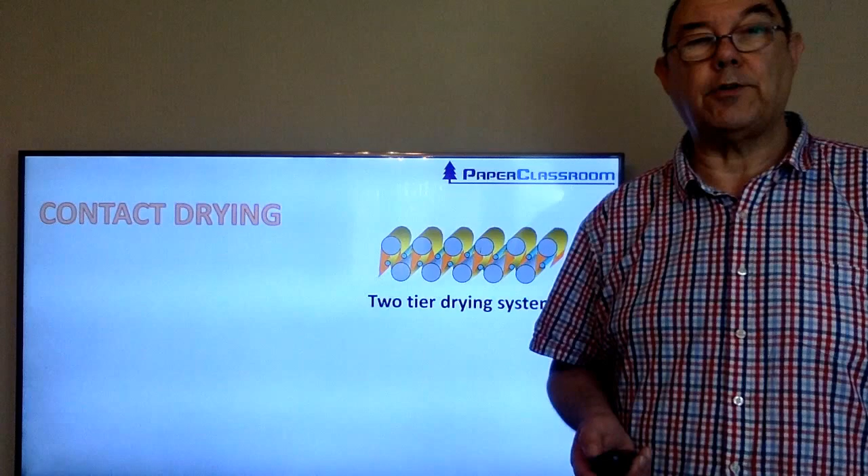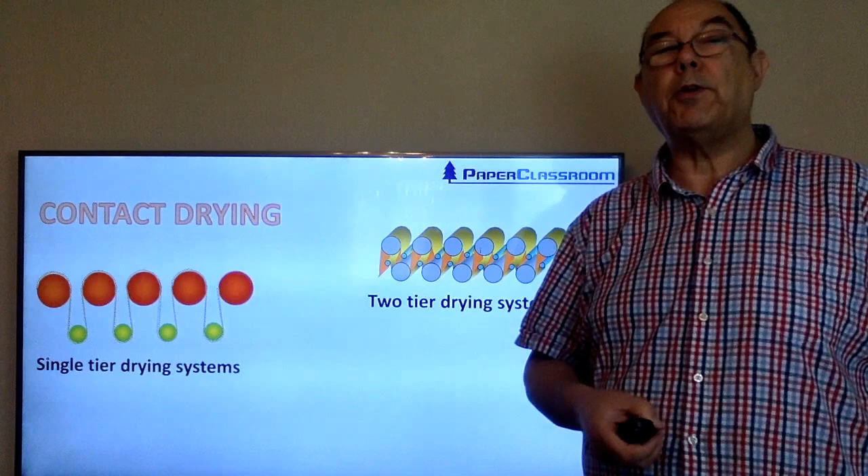So there are three basic techniques for contact drying. The vast majority of paper machines operate like this on the two-tier drying cylinder system. The more modern paper machines that run faster, that have a greater need for sheet stability, will use a single tier drying system. And there's a very old technique but still around, and that simply uses one single drying cylinder.

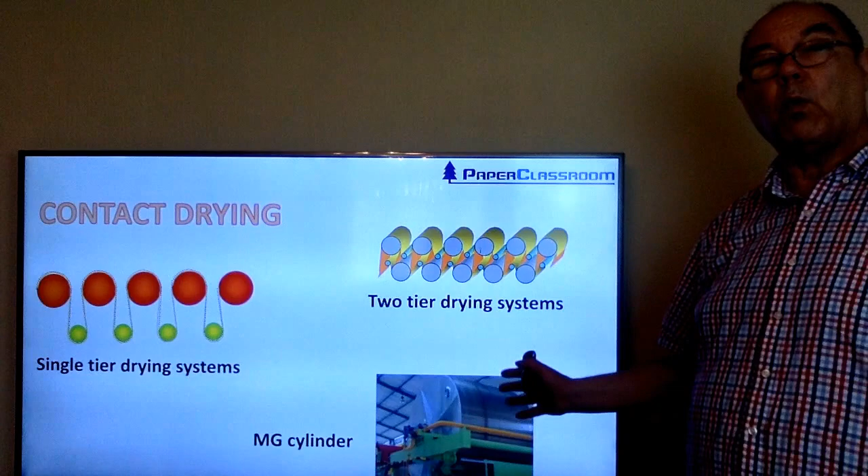So no draws to worry about, no tensions to worry about. You slap on the wet sheet at one side and you pull it off at the other side, nice and dry.

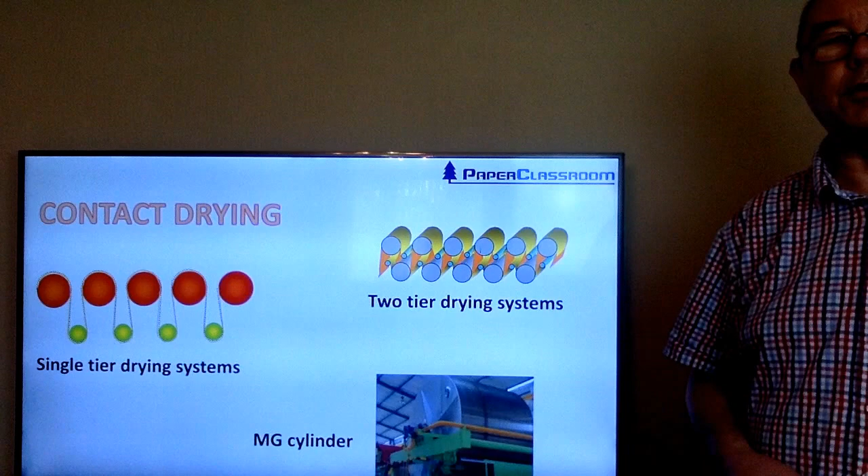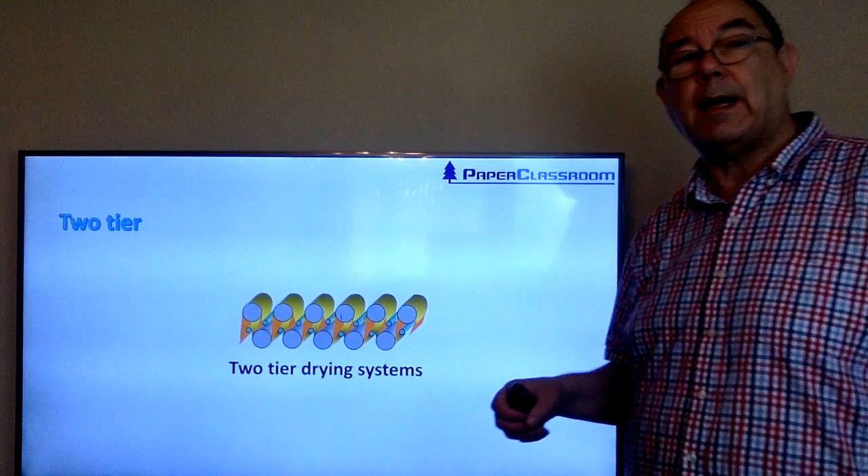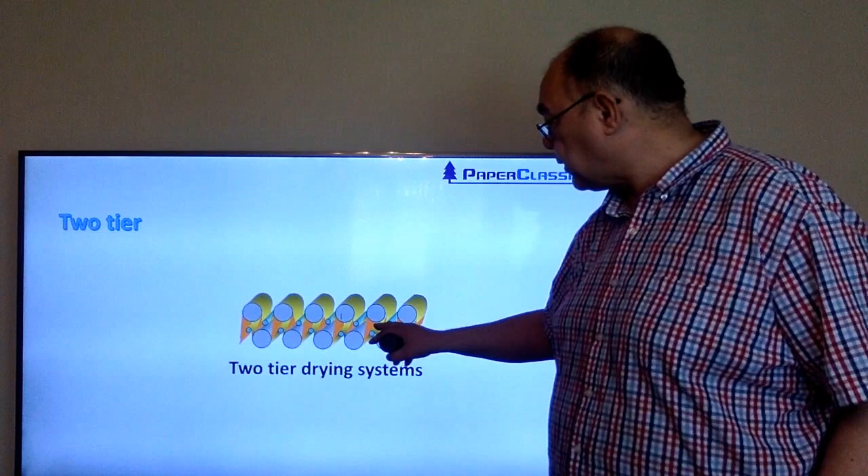Two-tier systems have got advantages and disadvantages. The advantages are they dry alternate sides of the sheet, so you get a nice even non-two-sided sheet, but it has problems that we'll talk about in these other videos associated with these pockets here. So we have pocket ventilation problems.

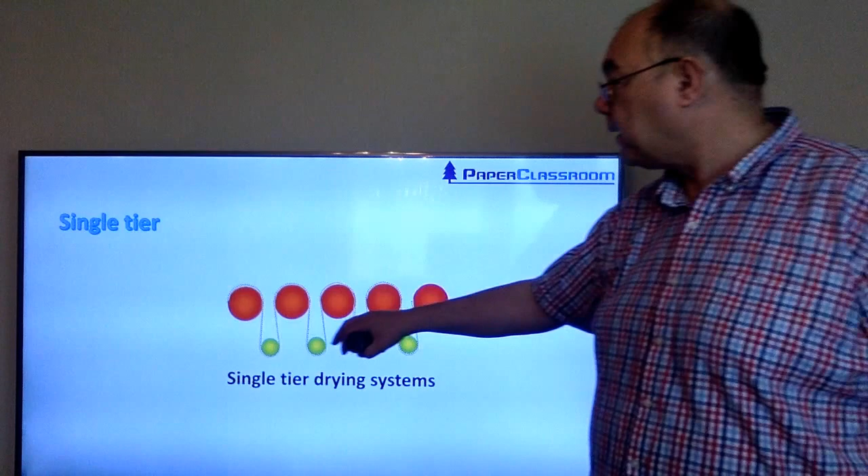Single tier drying system, this is the modern version, but as you can see there, the sheet is in contact with the top surface of the drying cylinder there, but this here is a vacuum cylinder, it's not a drying cylinder, so you only dry one side of the sheet. So you have to have another bank where everything's turned around and then you dry the other side. So you dry sheets one side at a time.

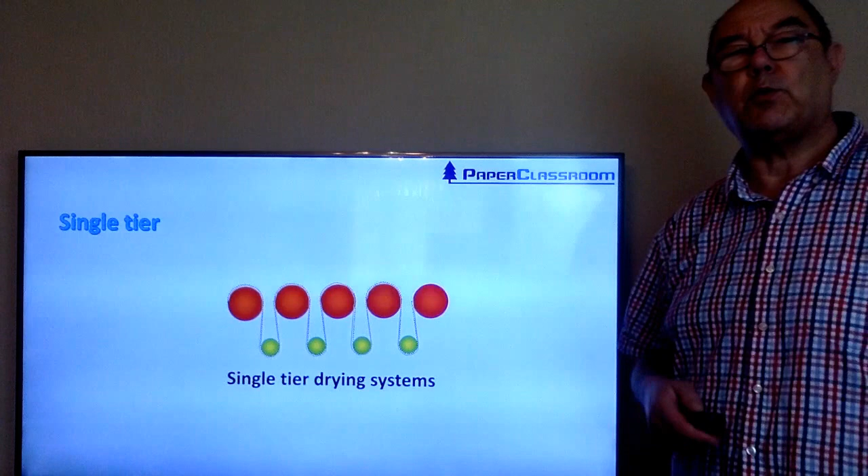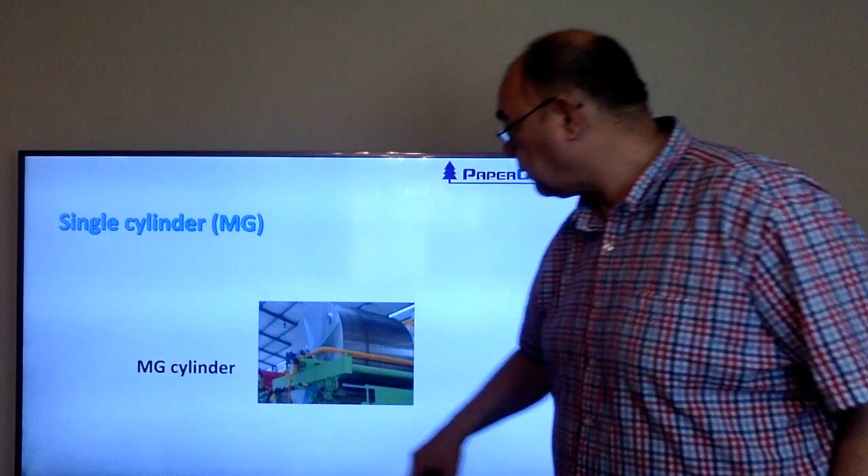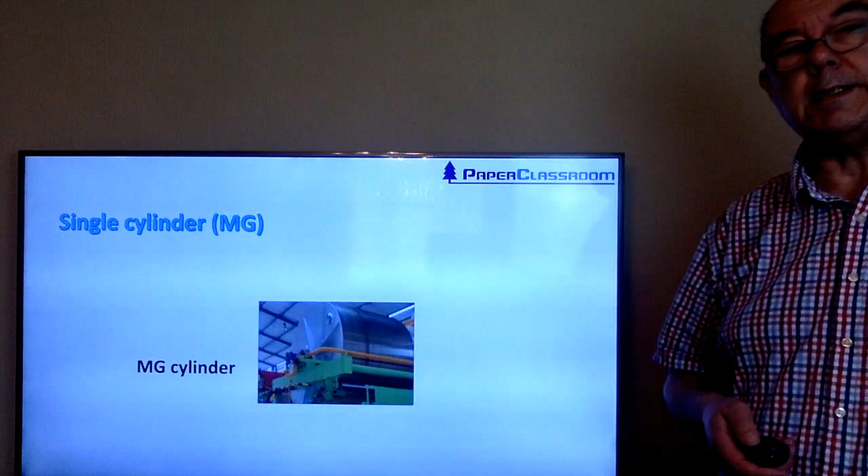And of course, single cylinders, MG cylinders. As I said, you put the cold wet paper on at one side, bring it around, peel it off. Typical MG cylinders weigh 100 up to 180 tons. So we'll talk in more detail about each of these three in these subsequent videos.

So thank you for listening, and a summary of what we've talked about in this video. Three different techniques for drying, contact drying of paper. There's the two-tier method, which is the traditional method with all its pros and cons. There's the single-tier, more modern method, and there's the old and reliable MG cylinder. MG of course stands for machine glazed, and when we talk about the MG cylinder, I'll explain where the term machine glazed comes from.